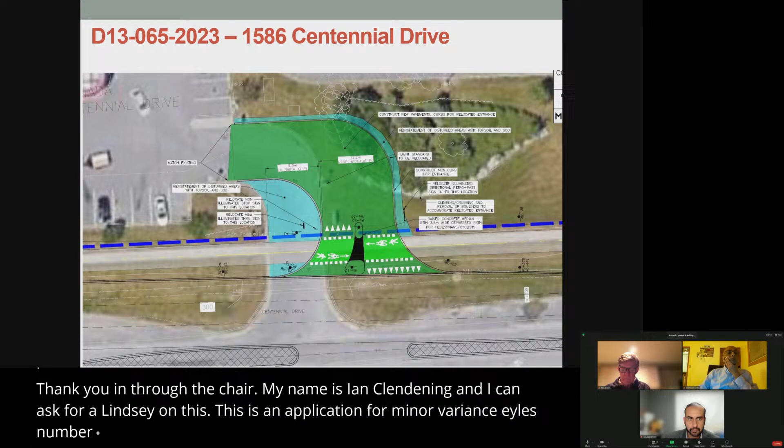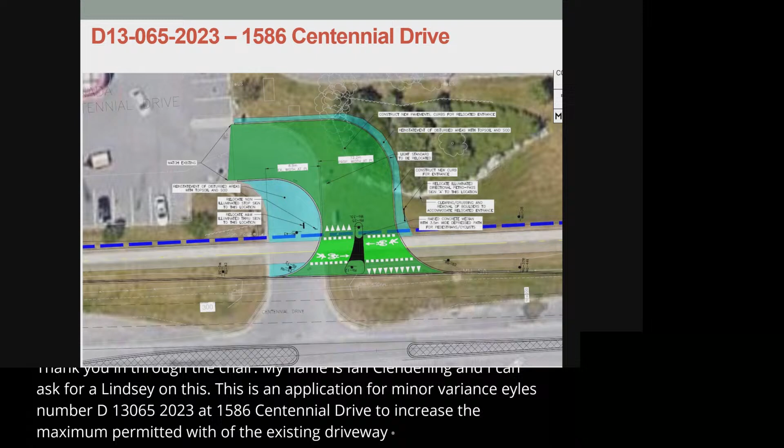So now we're on to our first piece of new business, which is an application for minor variance for 1586 Centennial Drive. Lindsay, can I have you read this into the record, please? Through the chair, my name is Ian Clendenning, and I can act for Lindsay on this. This is an application for minor variance, file number D13-065-2023 at 1586 Centennial Drive to increase the maximum permitted width of the existing driveway along Centennial Drive. Great, thanks for that, and welcome.

So do we have the applicant here with us? If I could just have you state your name and address for the record, please. Good evening, Mr. Chair. My name is Tarita Ditchke, and I'm the project manager with Transportation Services for the City of Kingston. I'm acting as the agent on behalf of Suncor Energies, who is the property owner for 1586 Centennial Drive. Happy to answer any questions. Very good. Thanks very much and welcome.

All right, committee members, do you have any questions for the applicant or staff? Yes, Jeff. Thank you, Mr. Chair. So I take it this is a very tight intersection and driveway, and an awful lot of the tandem transports are coming in off the 401 into the north end of Kingston there, and if I've got this correct, it's the only interchange in the city of Kingston that can handle double transports. Is this to also assist in the movement of these trailer transports in this area?

Through you, Mr. Chair. Yes, the intersection will accommodate the LCV long combination vehicles, specifically the southbound left turn movements. We will be introducing two left turn movements going that way, so we'll also be widening to two lanes as a receiving lane. The reason why we are having to relocate this intersection is to give that space at the intersection where if there's a vehicle who wishes to turn left into the property, it has space to do so without backing up into the intersection. Long combination vehicles can still access this site through Robinson's Court, which is the second access point to the site, and that's been historically how they've been accessing the site anyway.

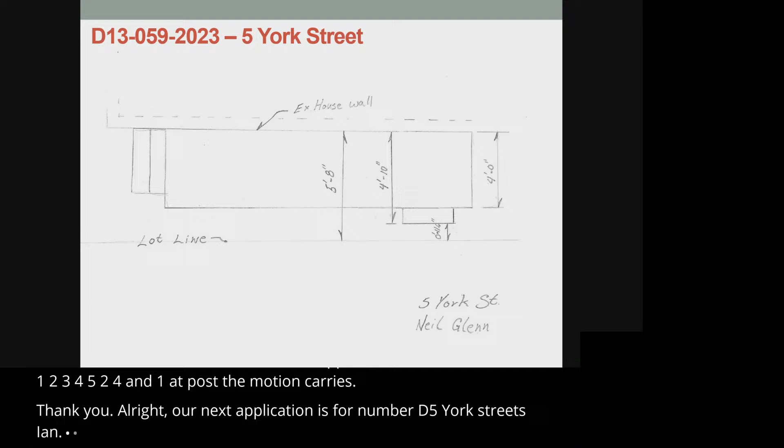Thank you. All right, our next application is for number D, 5 York Street. Ian, could you read this? Oh, I'm sorry, I missed one, my bad - Palace Road, 390 Palace Road. Ian, can I have you read that one in?

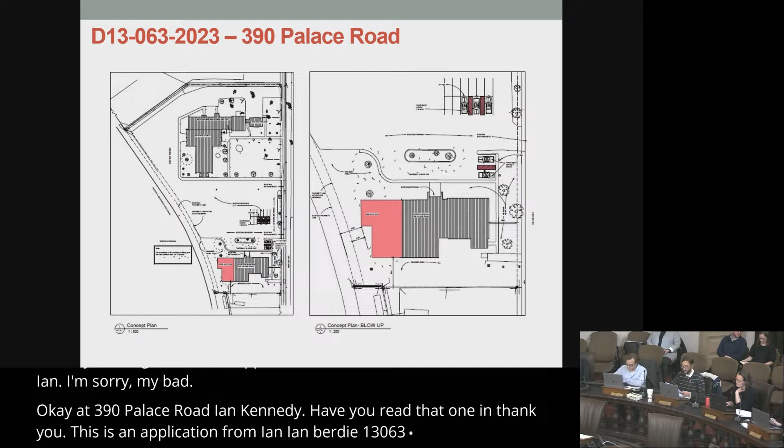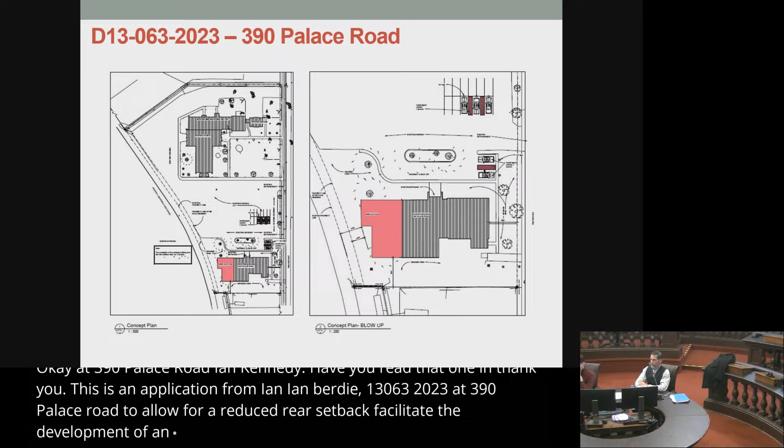Through the chair, this is an application for minor variance, file number D13063-2023 at 390 Palace Road, to allow for a reduced rear setback to facilitate the development of an office building addition. Great, thank you. Do we have the applicant or their agent in the room or online?

Through you, Mr. Chair, I just received an email from the applicant - I think he may have been having trouble finding the meeting room. Mr. Chair, I would suggest we defer this item until later on in the evening. Do we have concurrence for that? I don't need a vote, but is everybody in agreement?

Okay, so let's defer this toward the end. Right now we will go on to item number D. Ian, can you read that into the record please? Through the chair, this is an application for minor variance, file number D13059-2023 at 5 York Street, to allow for a reduced front setback to permit the construction of a porch.

Great, thank you. Do we have the applicant or agent with us? Oh yes, if you want to come up to one of these speakers. So welcome, if we could just turn the mic on and state your name and address for the record. Neil and Mary Glenn - the house we own is at 5 York Street, we are renovating it, we don't live in it at the moment.

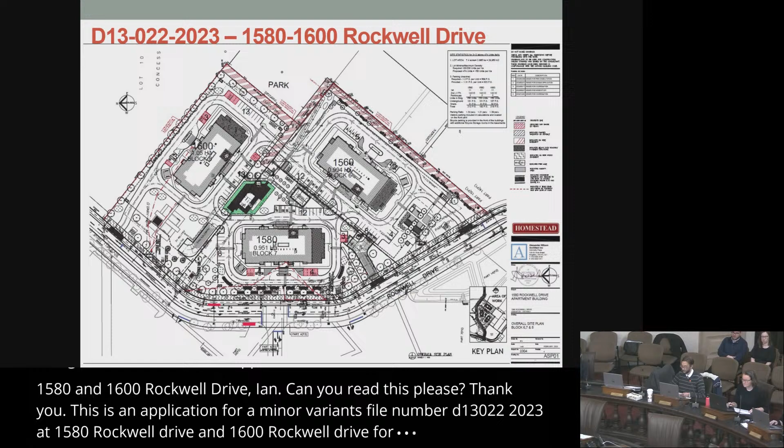All right, number E, the next application is for 1580 and 1600 Rockwell Drive. Ian, can you read this into the record, please? Through the chair, this is an application for a minor variance, file number D13022-2023, at 1580 Rockwell Drive and 1600 Rockwell Drive for relief for privacy yard depth, berm and landscaping, balcony length, and additional visitor and car share parking provisions.

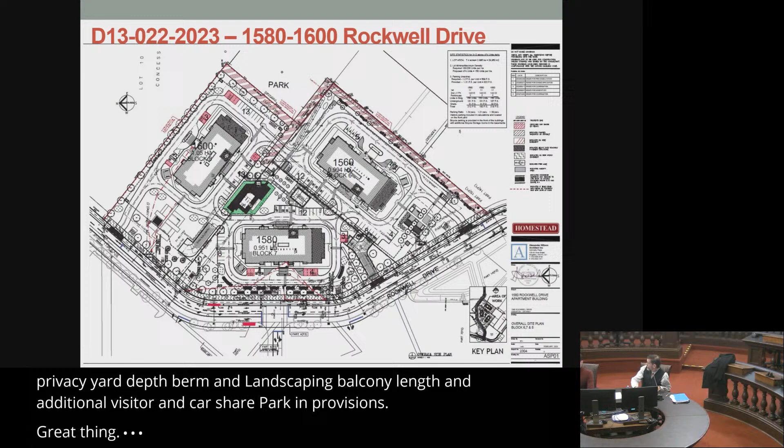Great, thank you. Do we have the applicant or their agent? Yes, please state your name and address for the record. Good evening, my name is Tess Gilchrist. I'm a professional planner with Arcadis, and I'm here on behalf of Homestead this evening. Great, and welcome. Is there anything further you want to add to the application?

If I may take a few moments, yes, I have a few things to note. On behalf of Homestead, we are seeking variances associated with privacy yards, parking, landscape buffers, and balcony projections for these two properties at 1580 and 1600 Rockwell Drive. I will focus on the parking variances, as I believe those related to landscape buffer, privacy yards, and balcony projections are a little bit less detailed.

For a bit of context, the two subject properties are proposed to be developed with 12-story residential apartment buildings with 158 units each, and they have a combination of below and at-grade parking. The below-grade parking podiums are connected to each other, as well as a third building which is under construction now. I think everyone's probably familiar with that if you've driven down Gardiner's and gone to the RioCan.

The site-specific zoning for the subject properties was established under the former zoning bylaw 7626, under a site-specific bylaw 2017-46, which was for the larger property known then as 700 Gardiner's Road. This zoning was put in place as part of the subdivision plan for the overall development of these lands.

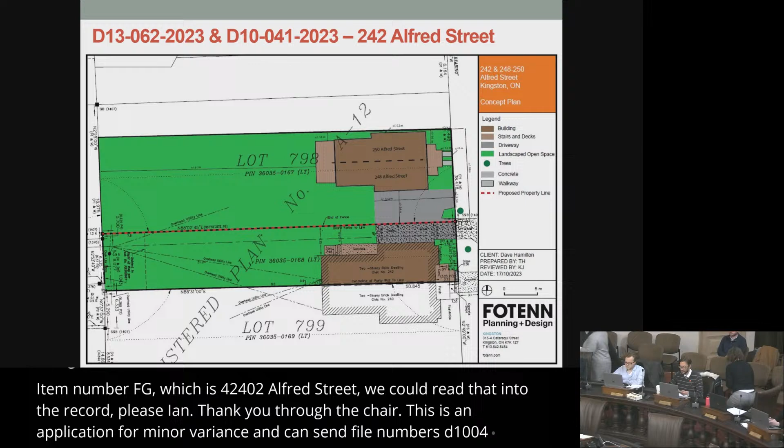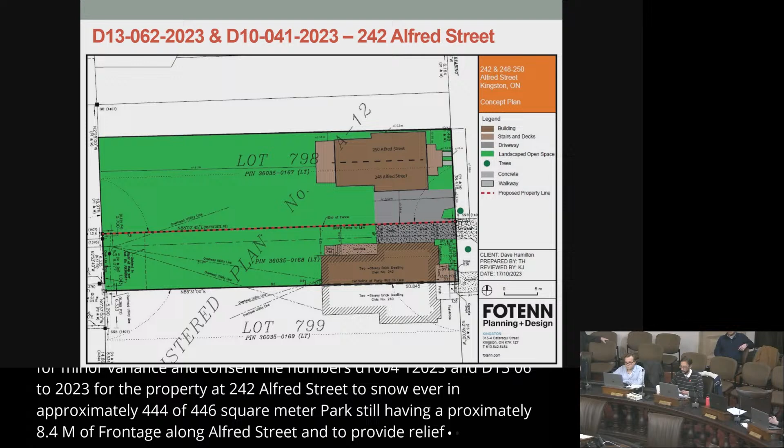All right, and now we have item number F, which is for 242 Alfred Street. If we could read that into the record, please, Ian. Thank you. Through the chair, this is an application for minor variance and consent, file numbers D10-041-2023 and D13-062-2023, for the property at 242 Alfred Street, to sever an approximately 446 square meter parcel having approximately 8.4 meters of frontage along Alfred Street, and to provide relief for the lot frontage, driveway width, interior setback, and interior setback of a porch on the severed lot.

Great, thank you, and we have the applicant here. Thank you, and through you, Mr. Chair. My name is Kelsey Jones. I'm a planner with Fotenn Planning and Design. I'm here this evening on behalf of the owner, David Hamilton, and happy to answer any questions from the public or committee.

Great, thanks, and welcome again. Committee members, do you have any questions for the agent? Yes, Jeff. Thank you, Mr. Chair. A question from Ms. Jones -- in this situation, we're dealing essentially with a cleanup situation, it's just a tidying up. Through you, Mr. Chair, that is correct. Thank you. Good. Any other questions?

I see none, so I'll open the public portion of the meeting. Do we have any members of the public with us wishing to speak to the application for 242 Alfred Street? Ian? I can confirm through you, Mr. Chair, there are no members of the public present. So I'll close the public portion of the meeting and come back to the committee for a motion. So moved by Ken, seconded by Gaurav. Any discussion? All in favor, raise your physical hands -- and that is unanimously carried. Thank you.

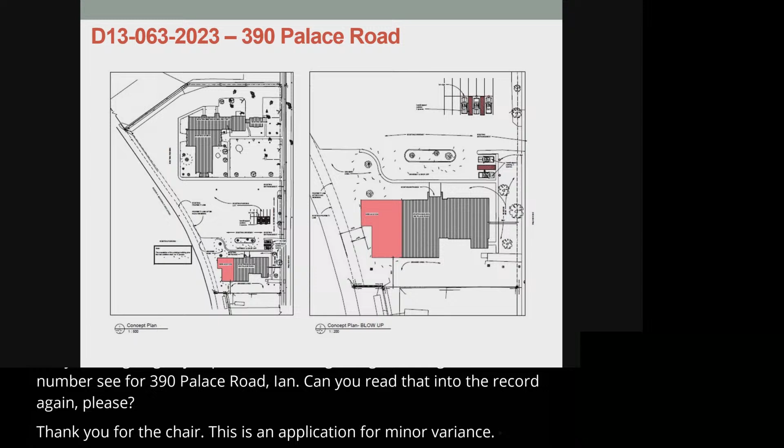Okay, we're going to jump back to the beginning of our agenda, item number C for 390 Palace Road. Ian, can you read that into the record again, please? Thank you. Through the chair, this is an application for minor variance, file number D13-063-2023, for the property located at 390 Palace Road, to allow for a reduced rear setback to facilitate the development of an office building addition.

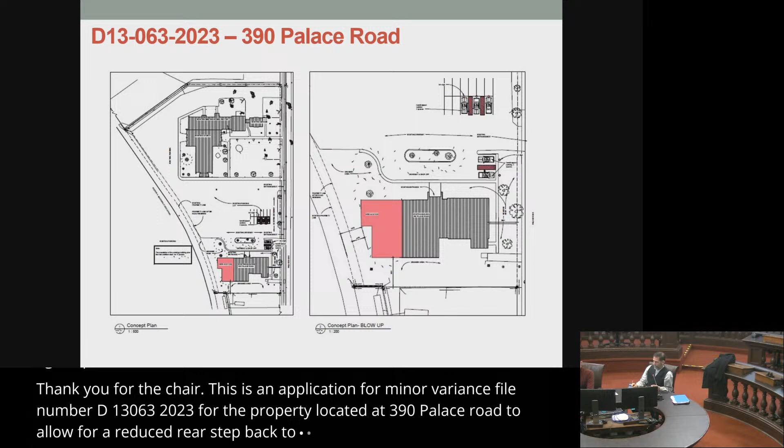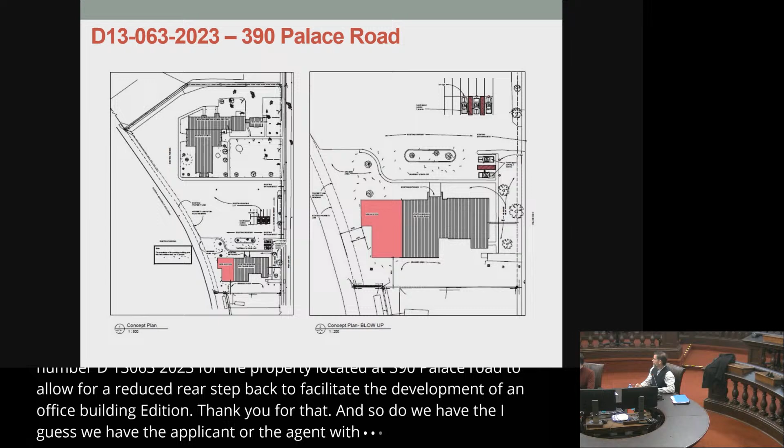Thank you for that. And so do we have, I guess, the applicant or the agent with us today? Yeah. And I'll ask you to state your name and address for the record. Oh, sorry, I think that was on already. Yeah, it's on, it's on, it's red. Okay, good evening.

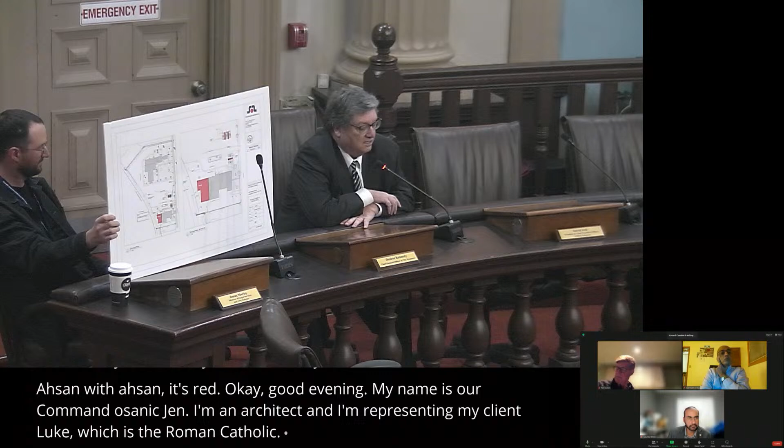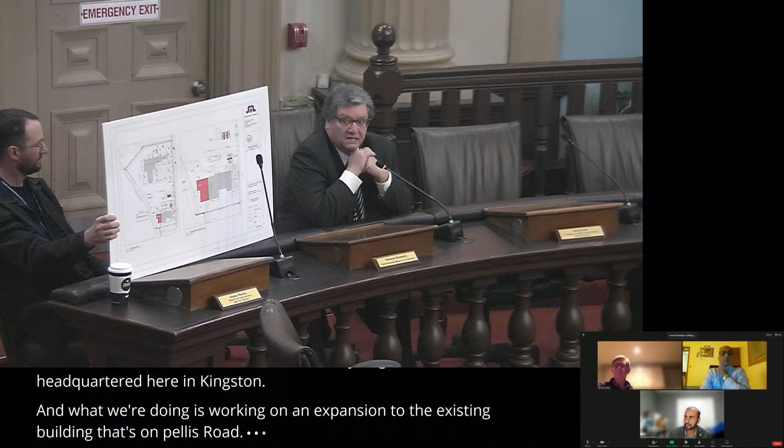My name is Armando Sardina. I'm an architect, and I'm representing my client, which is the Roman Catholic diocese -- a fairly large diocese, headquartered here in Kingston. What we're doing is working on an expansion to the existing building on Palace Road. I did an addition for them about 32 years ago, and they now want to put on another addition.

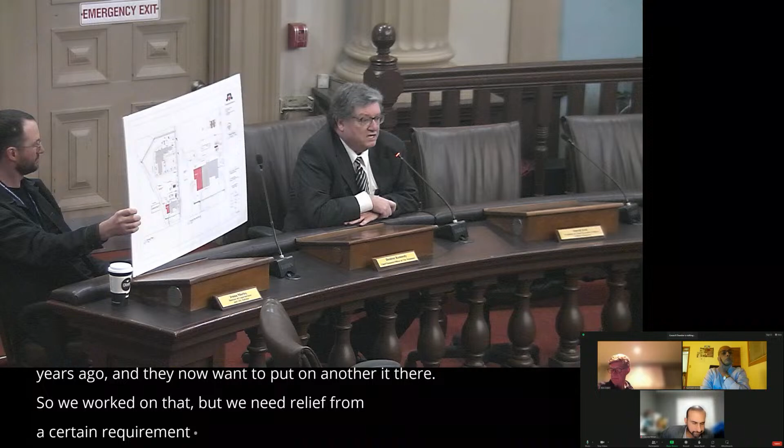So we've worked on that, but we need relief from a certain requirement. We have discovered that the city, in its official plan, intends to widen out Sir John A. Macdonald Boulevard, which had not been taken into account. So, working with your excellent staff, we have looked at the situation, and I think we're all of the opinion that we will be able to accommodate the widening of Sir John A. and still keep our building addition where we propose it to be.

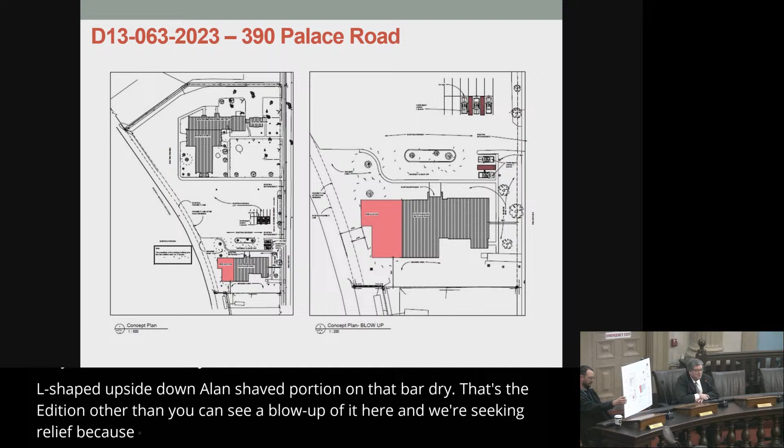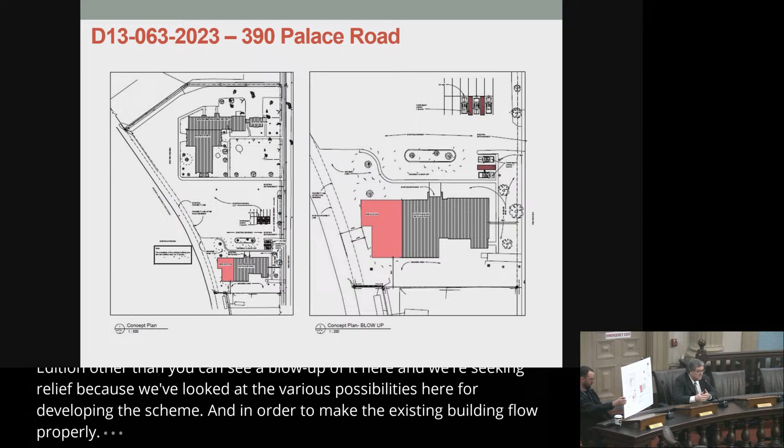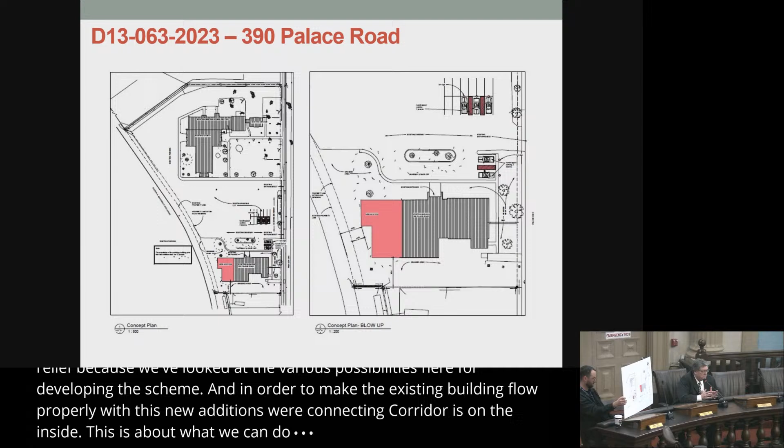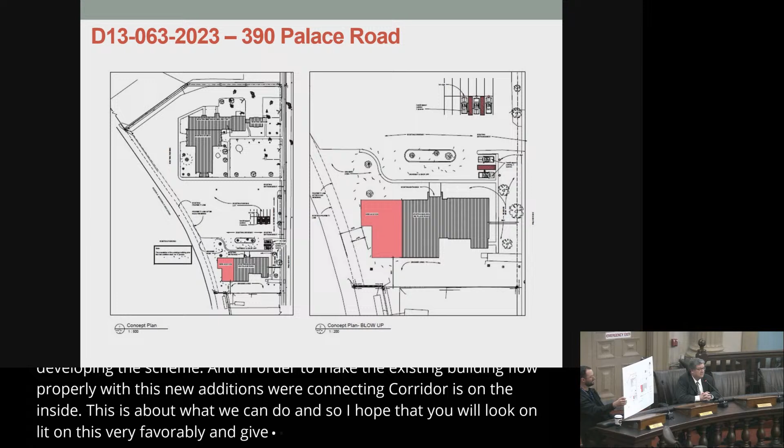And just for your information, if you can see that L-shaped, upside-down L-shaped portion on that far drawing, that's the addition. And you can see a blow-up of it here if this is zoomed up. We're seeking relief because we've looked at the various possibilities for developing the scheme, and in order to make the existing building flow properly with this new addition, connecting corridors on the inside, this is about what we can do. So I hope that you will look on this very favorably and give us your approval and accept the minor variance for this project.

Now, if you have any questions, please fire away. Great, thank you very much for that. So committee members, do you have any questions for the applicant or staff? I see a bunch of shaking heads no, so I'll open the public portion of the meeting.

Do we have members of the public with us wishing to speak to the application for 390 Palace Road? I can confirm there are currently no members of the public present. Okay, so I'll close the public portion of the meeting, come back to the committee for a motion. So moved by Somnath, seconded by Doug. Any discussion? So all in favor, raise your physical hands, and that is unanimously carried. Thank you.

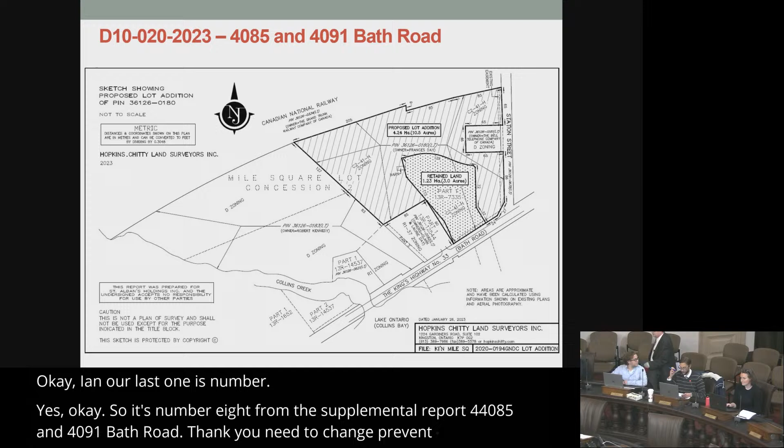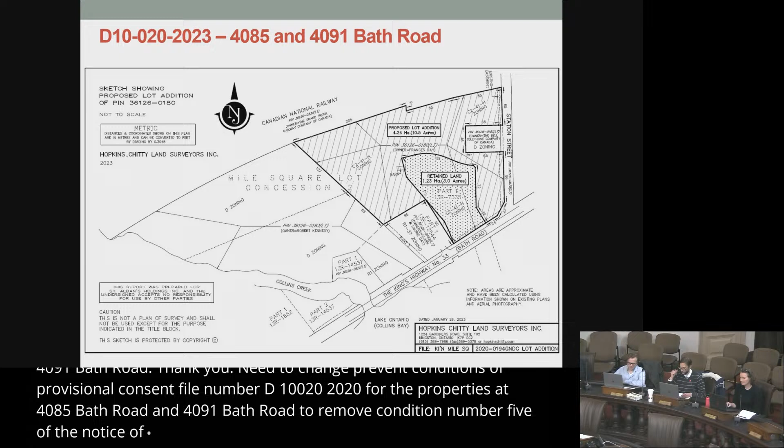Okay, and our last one is number G? G, but technically H because of the supplemental. Yes, okay, so it's number H from the supplemental report for 4085 and 4091 Bath Road. Through the chair, this is an application to change conditions of provisional consent, file number D10-020-2020, for the properties at 4085 Bath Road and 4091 Bath Road, to remove condition number 5 of the notice of decision for consent application file number D10-020-2022 pertaining to a required road widening.

Great, thank you. And do we have the applicant with us this evening? Can I have you state your name and address for the record, please? Hi, my name is Nancy Wortman, and I'm the planner with Arcadis. My address is 844 Safari Drive. And I believe the applicant himself is also on the call, and I will allow him to introduce himself as well, but happy to answer any questions if there are any.

Great, thanks and welcome. All right, committee members, do you have any questions for the applicant? I see none, so I'll open the public portion of the meeting. Ken, you have a question? Yes.

I believe Mr. Clendenning clarified it as an application to delete a condition, whereas we have an addendum, which is in fact a recommendation to amend the condition of an existing approval. Yes, so through you, Mr. Chair, when you passed the addendum, the note mentioned the new report, which is the supplemental report, will be dealt with before item G. They're doing the same thing. It's just that the supplemental was correcting the recommendation, and so once item H is either passed or failed, if it passes, item G will be withdrawn. If it doesn't, we'll go and talk about item G. But currently, we're on the supplemental, which is the up-to-date version.